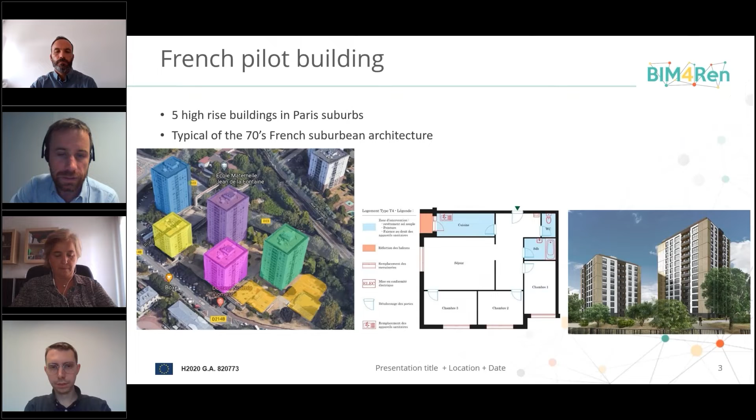There are in total almost 400 dwellings, so it's quite an important renovation that amounts to more than 10 million euros.

The renovation design selected is mainly about the envelope of the building—external thermal insulation renovation, improving air tightness. The air renewal of the dwelling is also to be modified, and the central gas boiler for heating and domestic water will be replaced.

There are also other renovations not related to energy performance, about the bathroom, electricity, internal areas, external areas, security, and so on. We underline this just to show that energy is not the only criteria, and sometimes it could even be secondary if we consider, for example, security or other such criteria that could trigger the renovation.

The objective of developing the tools was to digitalize the process and to consider, at an early stage of the project, the costs, the energy consumption of the existing state and under potential renovation scenarios, the CO2 equivalent emissions under those different scenarios, and also—which is a bit more important nowadays—the comfort in the dwellings over the summer. It has to be quite quick but reliable.

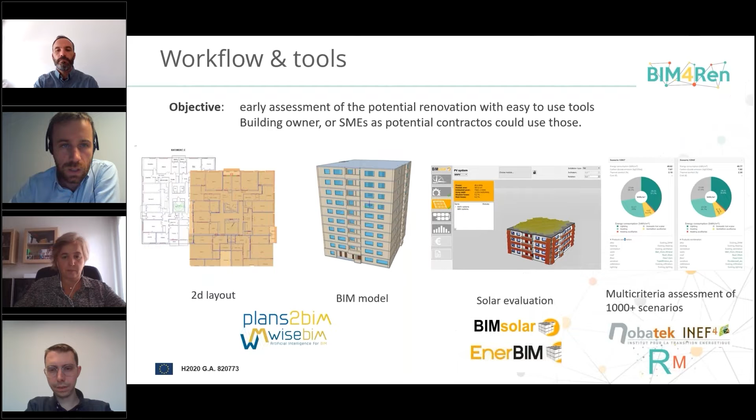We start with 2D layouts of the building, and from those 2D layouts we create an IFC model, a BIM model, using Plans to BIM by WiseBIM. Afterwards, this BIM model will be imported into another tool, the BIM Solar tool by EnerBIM. The last one will be the energy renovation scenarios assessment tool, called Renovation Manager. I'm starting with a short presentation of WiseBIM, and then I will use the tool.

WiseBIM is a French startup, a few years old, that has developed Plans to BIM. Plans to BIM is an online software that imports 2D plans and layouts as images, and by identifying patterns through artificial intelligence, it recognizes the elements composing the building—walls, windows, and so on—to create a BIM model in IFC as a standard.

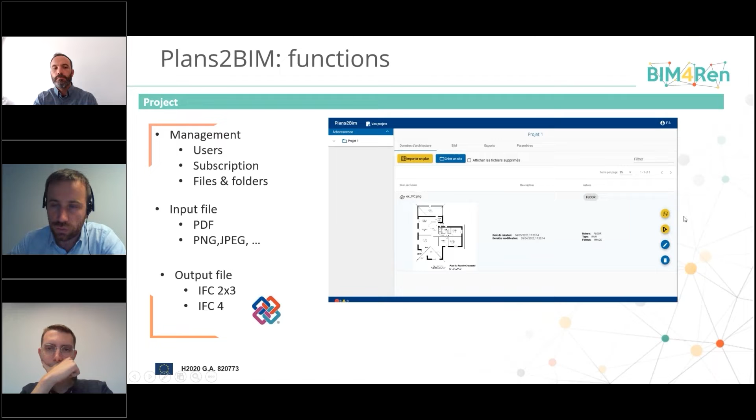So I'll go quick, but it's an online web tool in which you will have access. You will use as inputs the 2D layouts, and through different steps, at the end of the process, you will create an IFC file that you can have as either IFC 2x3 or IFC4.

What's key also, it embeds a viewer and an editor. I will demonstrate. It allows the model to recognize walls, windows, doors, slabs, spaces, which is information on top of the geometry - information about what is a wall, external wall, internal wall, window, and even properties of the wall can be added.

So that's the process of collecting such 2D layouts. Either it exists before even considering the renovation, or it has to be created by other alternatives, such as a scan or a surveyor that will create those 2D layouts.

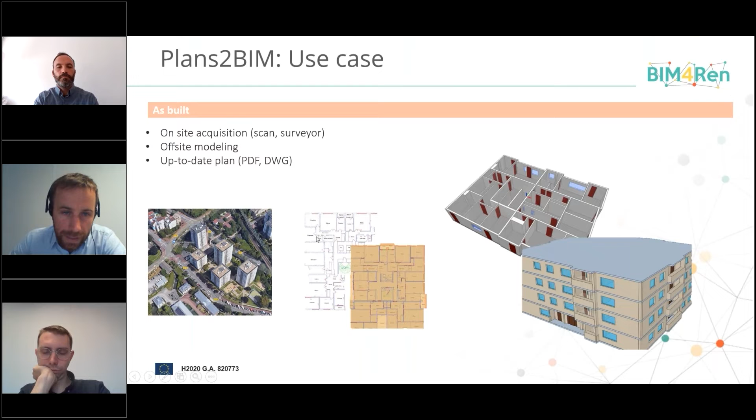Plans to BIM is, as you can see, a web-based tool in which you log in. It's free to create an account, then you create a project. Here I have a project already created. In this project I will find my different buildings, and in a building I will find different floors.

In this case, in the Joinville building, which is the one we are considering, I will import the plan layout. From this layout, it will recognize the PDF file I just imported, which you can see here. I will import it. It is now uploaded, and I will work on this case.

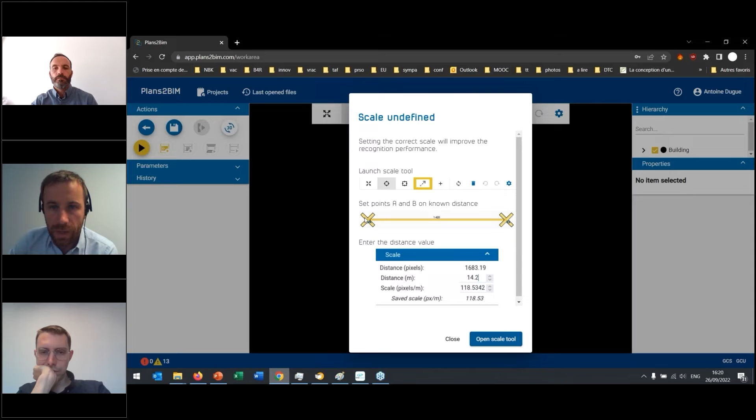You can see the layer. So I will open it in the modeling tool, where I first need to define the scale as an input. Here I'm just going to zoom in - it's pretty easy, the typical buttons.

I recognize that in this kitchen, these lines that I can adjust a bit measure 4.45 meters. I'll just put it there and validate. It says there are 74 pixels per meter, which is okay - let's just say it's not perfect, could be better quality.

Once I've got this scale, I can run the automatic detection. I will run the full detection - I could do it step-by-step, but let's see how it goes. There are parameters to recognize the wall thickness, it might not be exactly that, and minimum length, so you can adapt a bit.

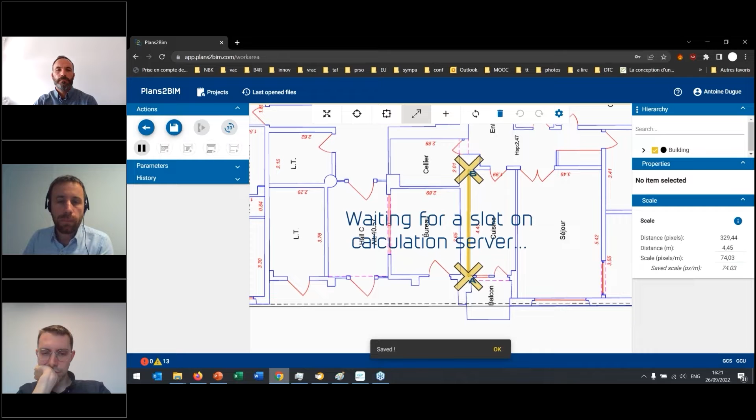I will now run the automatic detection. It is done on the Joinville 7. You can see it's a quite short process. I'll tell you that it is, again, free to use at this point.

You are going to create BIM models that you can edit, and you only pay if you export it as an IFC file. So you can try it and see if the results fit your expectations.

So you can see now the model that has been created, and now there's more information. You can see there are some blurry elements here and there. It can be pretty easily fixed, as you can see, I'm going to remove some of them.

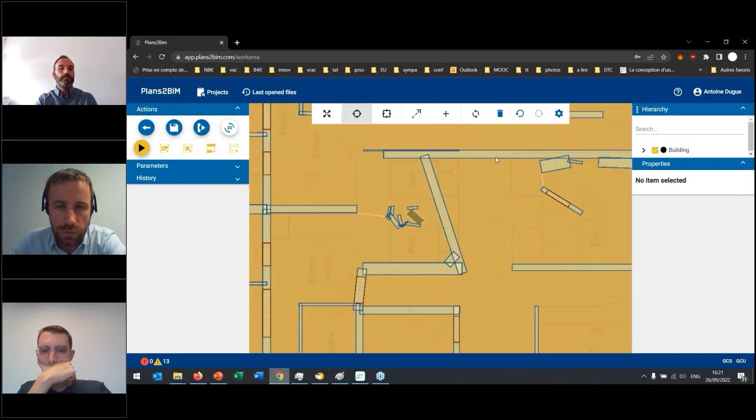I'm not going to go through the full process of modifying that. There is a stair here that has been poorly recognized, but I can, for example, use a wall and modify it - oops. Okay, I'm going to use, I might have...

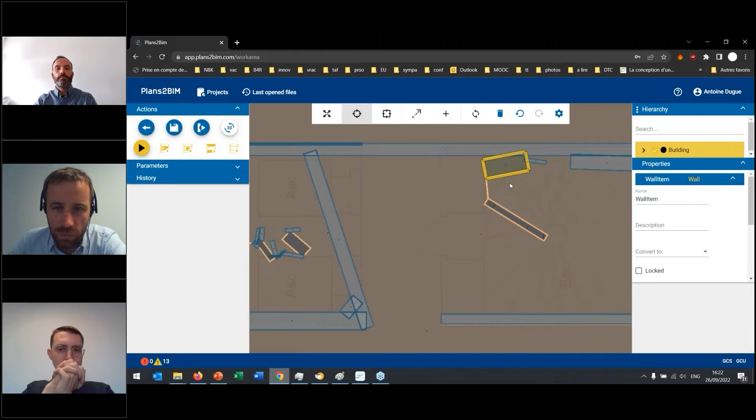Okay, box selection - I'm selecting this, and you can see that I'm moving it. I want to rotate it, but I'm opening too much, as you can see at this stage. It's the zone I'm selecting, I'm not actually selecting a wall.

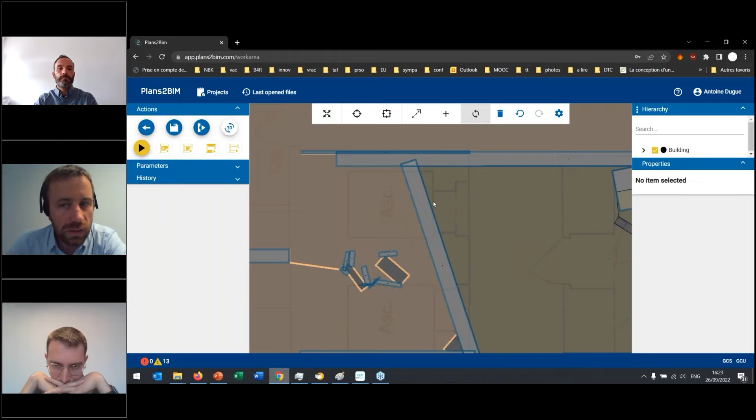So here, this wall - I'm trying to fix some elements. You can see that the zone is created. I'd be happy if I could turn it, because it does tell me that it's a wall item. I want to rotate it, but not using this one - right now I fail to move it.

Yeah, as you can see, I can modify it. I'm not clearly an expert user, so it should be better done by someone who has been testing it a bit more.

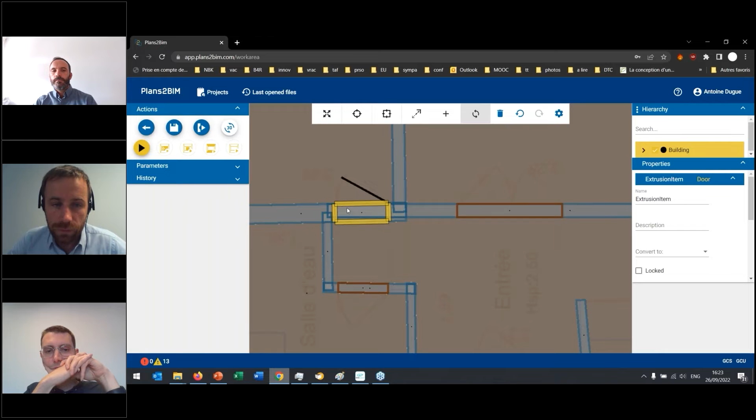So once you're happy, you can then export the model. At this stage, you can also just check in an internal viewer if it's well recognized. The very problem that I had noticed is here: the slab is not closed.

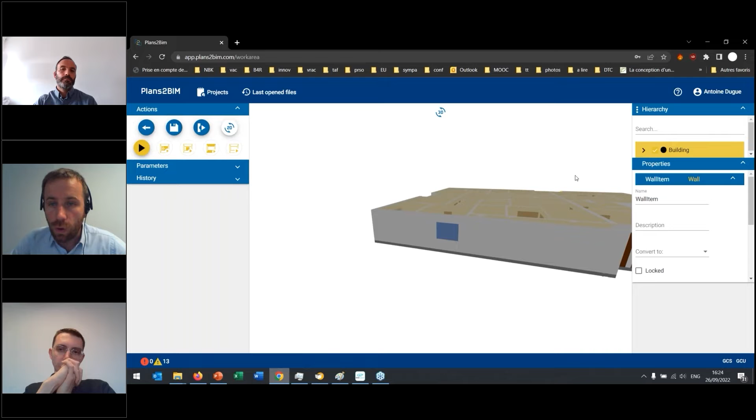There are some blurry elements that should be fixed. So although it's not a perfect recognition of the file, it's still something which is easily fixed, and you can do it quite quick.

Okay, then if I am happy with these elements, I can save it, and then I will create potentially a few floors like that. Once I have the few floors, I will create the full building.

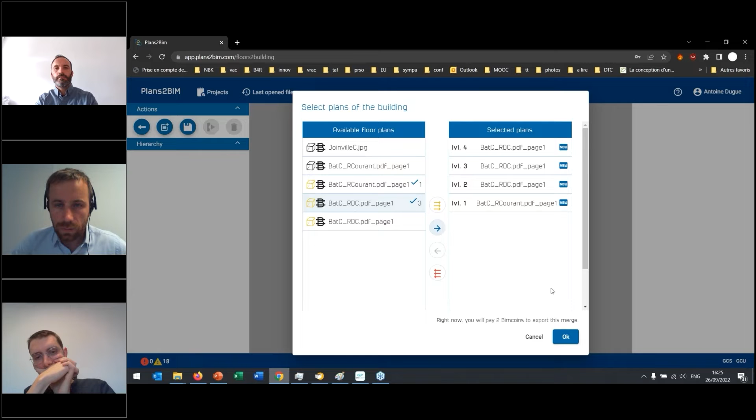Once I have that, I should be aligning those 2 floors that at the moment are not aligned.

The resulting process, when done a bit more carefully, is an IFC file such as this one. So this was done by, let's say, a half-day trained user in half an hour. You can see different storeys.

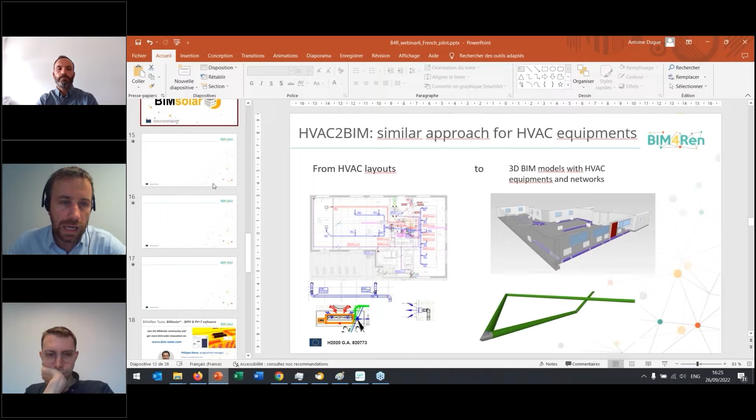So another tool is the BIMsolar tool. I'll be quick. The BIMsolar tool is a tool for urban planners and architects to assess the potential of PV installation for existing buildings. The idea is to import a BIM model to assess the installation of PV panels, the electrical production, and even potentially the cost of it.

The technical outcomes, the outputs of this software, are the electrical production, the potential losses in the wiring, and even a cost assessment and self-consumption under different scenarios.

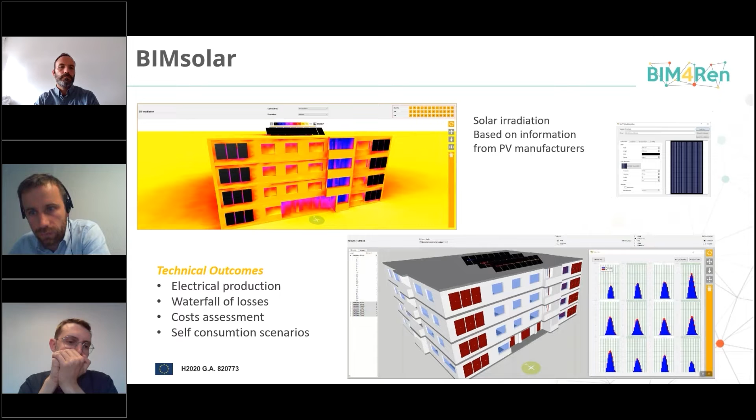Again, very shortly, I will show that this is the very same building that has been at the beginning imported, where you can see, regarding the sun path, its irradiation. I can see it at different moments.

The one thing which is very important is that the PV panels you're going to install come from an external library made of PV panels as BIM objects. Those have been provided by the very same manufacturers.

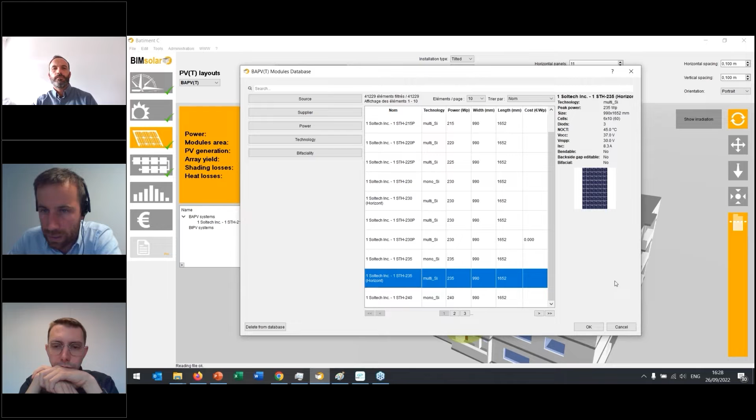So if I change, I choose one, this is the one that I now have, and if I choose to install it on the roof, as you can see, I will have it. I will quite easily duplicate it just to assess the potential installation, and obviously you can do it a bit cleaner than that. I've got this huge PV installation on the roof.

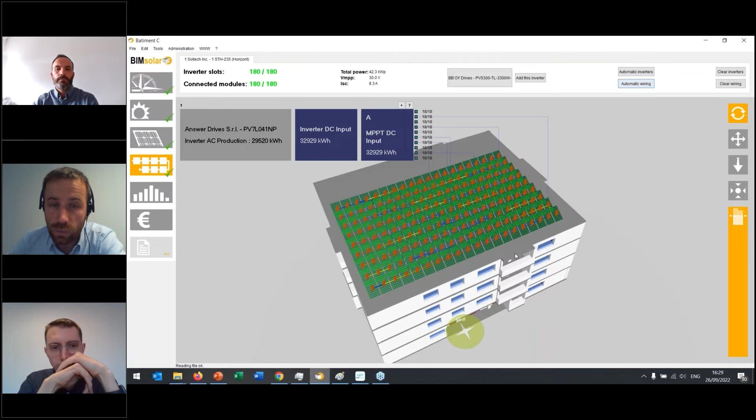I will then consider the wiring of the different elements. I can even say this is - I will just choose the first inverter and go with automatic wiring in between each of those.

And from there, it's possible to assess for those elements the monthly production, as you can see, for each of those panels. And once we have that, you can check on those different scenarios the network consumption and the self-consumption if there is electrical load from the building.

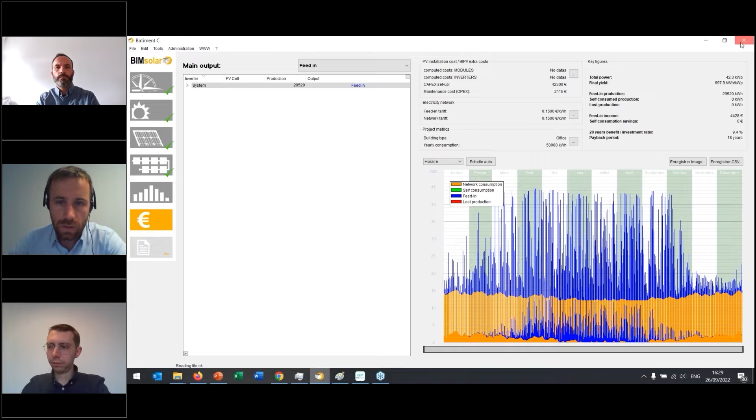So again, this is a free tool that you can find easily online, based on BIM, to assess the potential of solar installation. Philippe Alamy is the main developer, with his company, which is called Enerbim, a French SME.

Another tool is a renovation manager. For a set of buildings in a building management portfolio, we will consider different renovation projects, and for those renovation projects, we can consider renovation scenarios. For example, there could be a low ambitious one and a high ambitious one as a project.

Then we describe the potential renovation of a building. The idea is we start with buildings in this portfolio, we create those renovation projects, and then we focus on the energy renovation and run those simulations. What's key is that the building is composed of envelopes and systems, an envelope being walls, windows, roof, doors, and even the infiltration related to each of those elements. The HVAC systems are mainly ventilation, heating, domestic hot water, and lighting.

And the usage, the internal behavior of the tenants, is fixed. It's made under some hypothesis, but it's not something that could be changed. The idea being that it's not part of the design, it's rather something related to the tenants themselves.

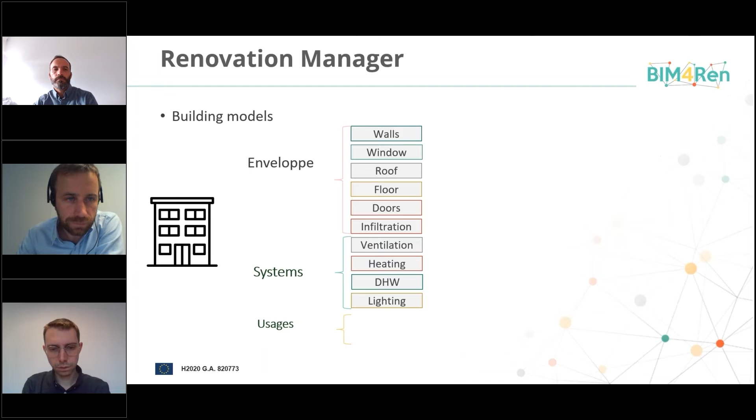So the idea is to explore the results dynamically in graphs, and then to export the potential energy consumption and so on. I will demonstrate that.

So this is the renovation manager. Similarly, one gets to log on to that. It's not at the moment, it's at a stage of development that's not allowed to have external users. Hopefully it will reach this point in the coming months or year.

So in this case, we have a building that is created. We are going to consider its renovation. First we need to add some basic information about the building regarding its facade area, the typical number of dwellings, and so on.

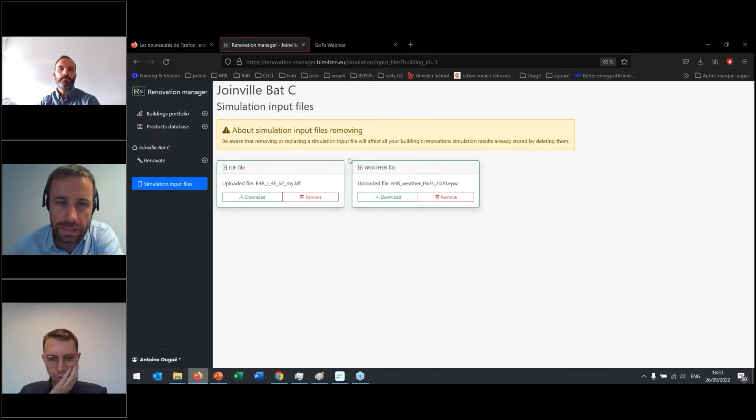Then we will use an input file that is used for energy simulation. In this case, it's done through the EnergyPlus engine, so it's an IDF file. More information could be found on the BIM4Ren website. A weather file is also dropped here, and you can see it has already been uploaded from the computer. So those two files have been uploaded in this case.

And the idea is to first describe the building. The domestic hot water is pretty straightforward: we select if it's done with, in this case, a gas boiler, electric hot water, or solar collector, the volume of it, and so on. We do the same for each component, the heating system, and typically the window, for which we are going to choose its frame material and its thermal characteristics.

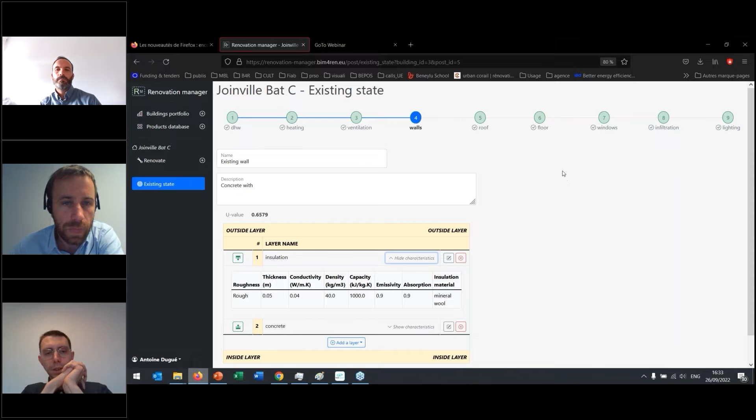Similarly, the wall is made of layers, in this case of concrete and insulation, for which we specify the characteristics and the thickness. Once this is done, the existing state of the building, we can consider some potential modifications. So modification is: okay, my heating system is initially the one I just showed, but it could also be a modified version with a higher efficiency, for example, that comes with a cost.

Similarly, the window that I just showed, I can consider a double glazing window with better characteristics, or even a double glazing window, but in this case the frame material would be aluminum in one case and wood in another. And the third one is a triple glazing window, with different characteristics. So then when I consider all those potential modifications, I'm facing quite a lot of potential renovation scenarios.

This is not the one I want. Well, I'm just using, let's say, a dummy test here. But if I want to consider a case, the one that's been done here is we consider the domestic hot water boiler modification, we consider the 3 different heating systems, and we consider the modification of the windows. At this stage, the combination of that is 64 potential scenarios. We are going to assess that.

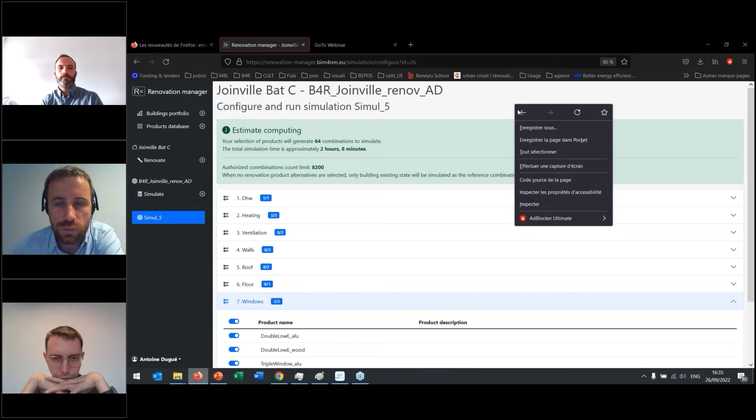So this is what the renovation manager is about: to compare and explore those different scenarios, and for a potential social housing organization to be able to themselves assess the potential renovation.

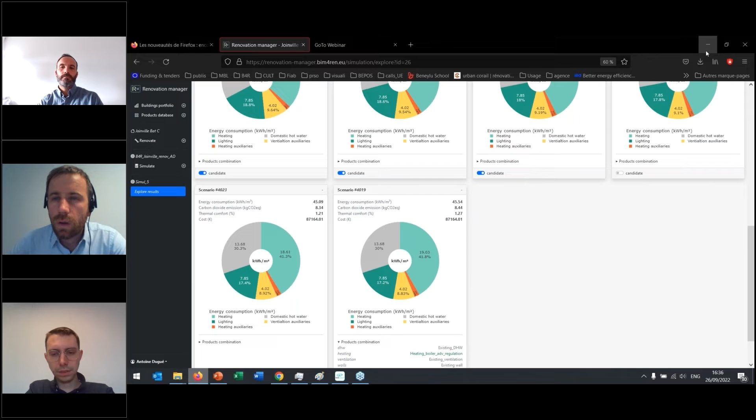And from there, this was 3 different tools that I showed, and more can be found on the BIM4Ren website, and that will be it for this French pilot demonstration.

My name is Natalia Lasarte. I'm from Tecnalia, a Spanish research center located in Basque Country.

Before giving the floor to Martín, a few words about the Spanish pilot and how this adventure started. When we drafted this project together with Nobatek and other partners, we were aware that the planned developments should be user-centered. That's to say, they needed to be tested, discussed, and validated by the end users during the whole process. Besides, the end user had to represent the common renovation company of the construction sector in Spain - a small size company with a low level of digitization, which represents the majority of the construction sector in Spain.

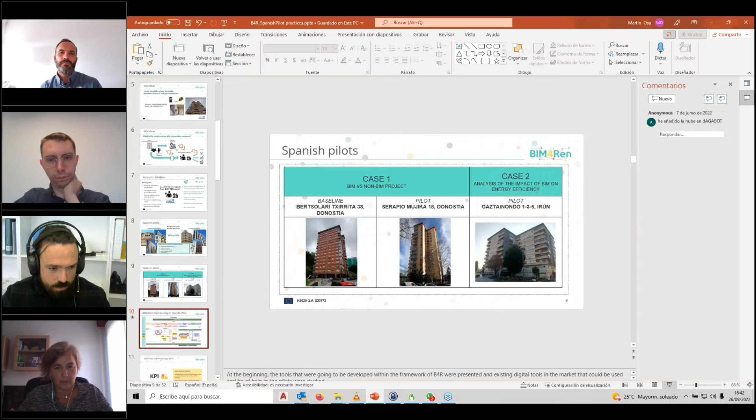First of all, I would like to explain briefly the process of a typical project - how is a typical workflow in a project of Grupo Kursaal?

Normally, usually the final client is a community of neighbors that wants to fix the pathologies of their building, and they want to do it through a property manager, or they can do it by themselves. So the first thing they have to do is look for an architect that will design and choose the best solution for their building. In our case, it's always about the energy renovation of facades, like ETICS or ventilated facades. Then after this, they must start a bidding process to choose a renovation company to execute the project that has been designed by the architect. At this step is when we have a first contact with the project, and we must study the work in detail in order to give them the most accurate budget possible.

At this point, we already encounter several problems. For example, on one hand, we cannot participate much in the initial design of the project because it has already been done by the architect, so the success of the project relies a lot on the workflow of the architect. So if it doesn't work with BIM tools, we won't be able to do a lot of things.

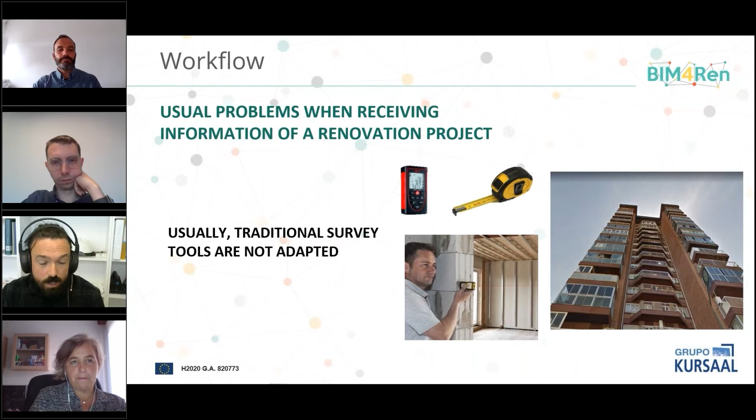Once we have made a first budget of the project, they will choose our offer, and the project starts. We have very tight deadlines. We have to hire the professionals who are going to carry out the works, and we have to start sharing documentation with the architect, the clients, and everyone who is going to participate in the project. A lot of documentation is generated at this stage: plans, images, budgets, technical documentation. So it is essential for us to have fluid communication with all these stakeholders.

We find ourselves, in summary, at the following point: we barely participate in the design phase. Our projects are not very complex, but it is important for us to have accurate plans and accurate documentation, and we have to manage a lot of documents and resources.

So we found that BIM4Ren could help us with the management of these documentations, because BIM methodology is a great opportunity to better organize and share documents. Also, even if we don't participate in the design phase, it is interesting for us to help the architects we work with in these phases. We will also be able to use different tools to better define the existing building, and this will finally stimulate the communication during the project.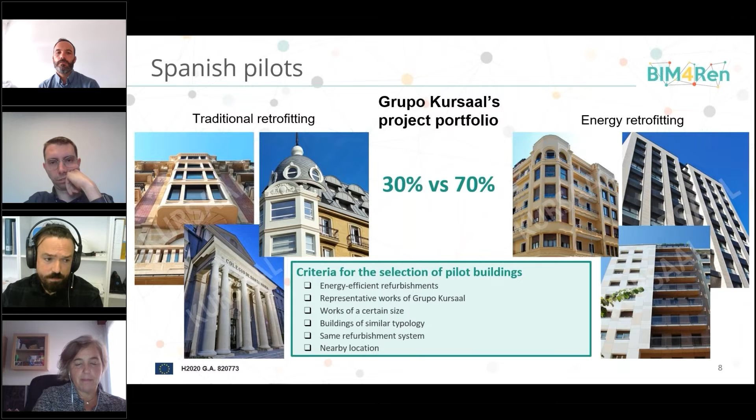In order to test the tools, we needed to choose some pilots to work with at the beginning, taking into consideration that most of our projects are energy renovation of facades. We thought it would be most interesting to choose a project that represents this kind of building, mostly energy renovations using ETICS or ventilated facade. So we chose three pilots to test different tools. On the one hand, in the first case...

We chose a baseline that would be used to compare the results we get in the pilots. The objective in this case is to carry out an analysis of the different processes in our company when working with traditional tools on one hand, and with BIM tools on the other.

The second case: here we also wanted to use BIM tools and digital tools, but we wanted to focus more on studying the impact these tools can have on the analysis and energy performance of a building, and to estimate the positive effect that the renovation can have on the facade.

These three projects have been developed almost entirely within the duration of the BIM4Ren project. At the beginning, the tools that were going to be developed within this project were presented by the different members of the BIM4Ren project, and we also studied the different tools available in the market, so we could choose the most interesting tools for us.

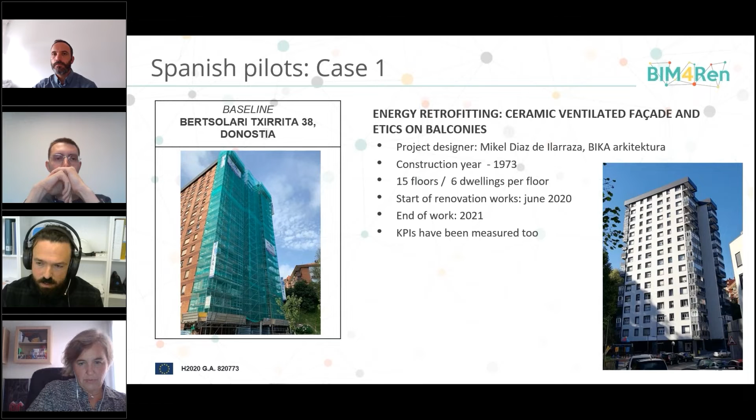As we wanted to use it as a reference, we measured different number indicators in this project. The pilot in this case was a similar building of 15 floors too, in San Sebastian, from more or less the same period, the 60s-70s. We also finished this project in 2021.

Here, the main objective was to generate and use an as-built BIM model in order to calculate as accurately as possible the material needed for the works, the material we had to buy, and to plan an optimum design of the execution of the ventilated facade.

Because it is a process that is quite expensive for us, we wanted to do it as well as possible. So the first step was to produce a reliable and accurate current state model that would allow the project managers to plan the project with the confidence or security they want, that they would work with reliable measurements and distances.

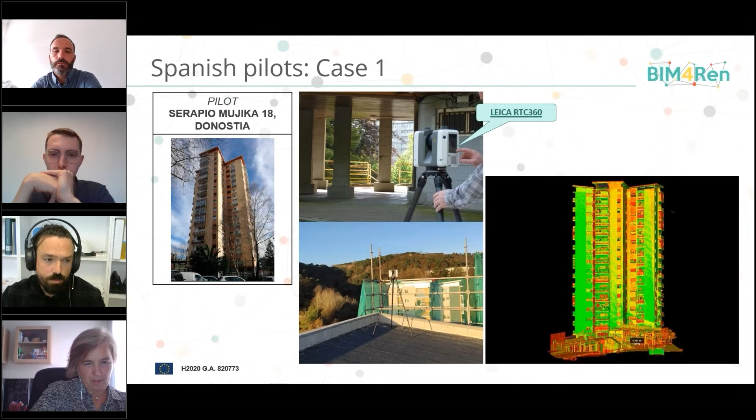To do this, the first thing we did was a 3D scan of the building envelope using a Leica scanner, and we captured the geometry of all the facades and the main access of the building. We also scanned the roof and some open balconies that were going to be renovated during the works. Once all the data was processed, we obtained a complete point cloud of the building that we used as a geometric reference to make the BIM model, as you can see here.

For this process, we followed a typical scan-to-BIM process. We introduced the point cloud into our BIM software, which was Autodesk Revit. This BIM model has been a great help for quantifying the amount of material and calculating the dimensions of the panels that had to be placed.

So that we could make an accurate plan of the cut of the panels in the factory, so we could reduce the generation of waste and be faster in the works.

The next pilot, the second case, was a pilot of a big residential building. There were like three buildings in one, so it started quite late in the project, but it is supposed to be finished at the end of this year.

Here, the renovation was going to be made with ETICS, but our main objective wasn't to plan exactly how we were going to execute, but to calculate the material needed for the works in order to get a better price from the professionals who were going to work there, and also to generate an energy model to compare it with the monitoring data that would be made afterward.

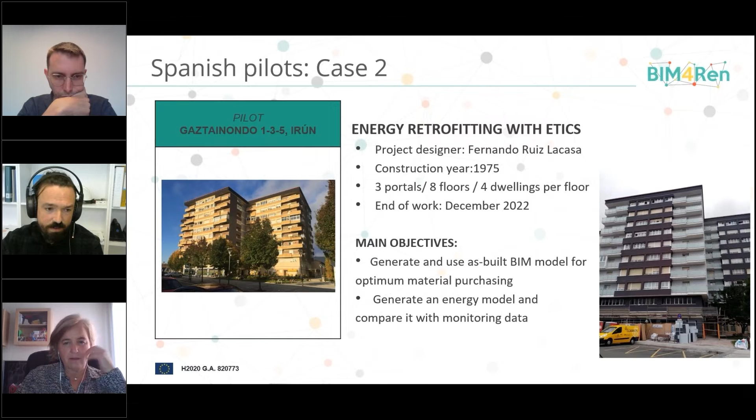In this pilot project, a scanning survey has been carried out as well. We have used it for generating a BIM model of the envelope and also of some dwellings that have been monitored, where we placed some devices for doing the energy monitoring in those dwellings.

With this BIM model, on one hand, we have calculated the work areas, the amount of square meters, and the amount of material required for the work. With this information, the manager of the works has been able to get a better price with each professional. We have analyzed the entire budget line by line, and also we have been able to separate it into different time phases.

This is a great help in order to better manage the different phases of the building and to better manage the amount of material that we have to stock in our works, and to improve the logistics of our projects.

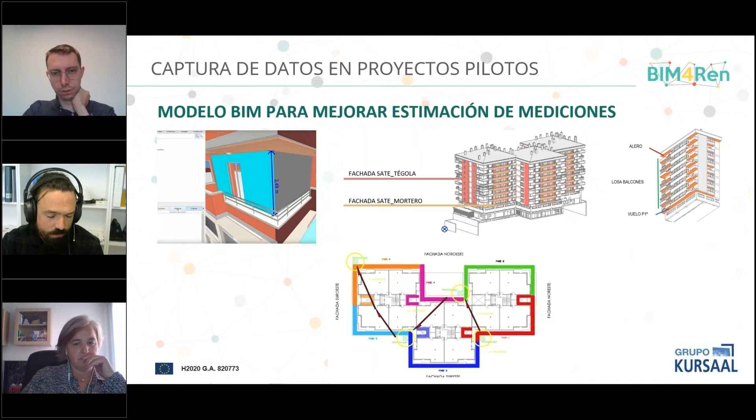In both pilots, we have tested different tools developed within the BIM4Ren project. It is true that several of these tools are not properly adapted to be used during the works, because they are more adapted for early phases of the design of the project. But it is interesting for us to get feedback to allow the developers to improve the tool.

So of these tools, we will focus on those developed by Tecnalia: the Parametric IFC tool, GIS-to-IFC, and BASE+. Once we tested all these tools, we made an analysis of them, evaluating different aspects such as usability, ease of use, and processing speed. The entire analysis will be reflected in the deliverable and published on the BIM for Rent website.

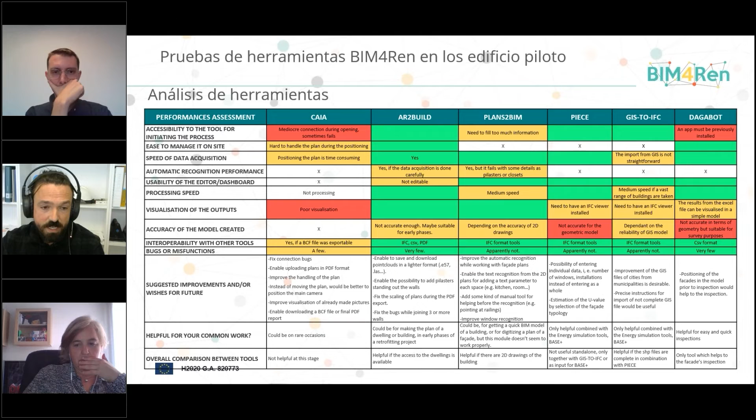So these three tools from Tecnalia - GIS-to-IFC, Parametric IFC, and BASE+ - are like a pack of three tools that we can use in sequence, or we can enter at different steps of this process. For example, if we didn't have any documentation of the building, we could try to go... but if we have a shapefile of the building, for example, the GIS...

GIS is a geographic information system where we could find, for example, the perimeters of the buildings of a city. It's a geometric database enriched with other kinds of data, like the height of the building or the use of the building. So if we have access to some of this information, we could get a file to introduce into this tool in order to generate an IFC BIM model. Quite simple, but we can start working with it.

If we didn't have access to this kind of file, we could enter the second tool directly and introduce the geometric form of the building manually. It will create a BIM model based on the information we input, so it would create a more accurate IFC model with the facades, the windows, the height, and the number of floors of the building. So we have a better base to start working with.

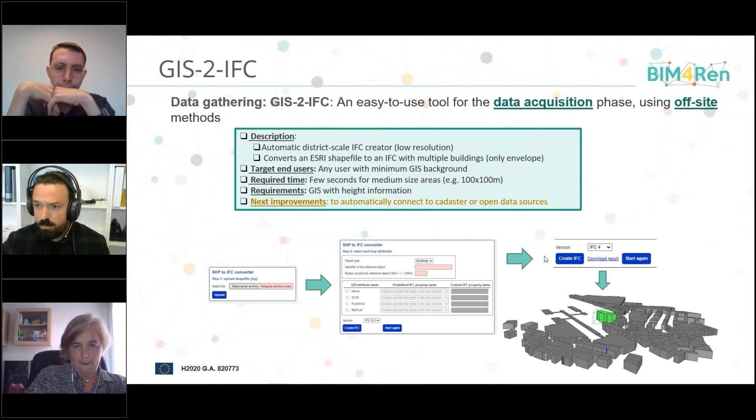For the first one, here you can see some captures of the interface, but there is a video that I would like to show you, so that you can see how it works.

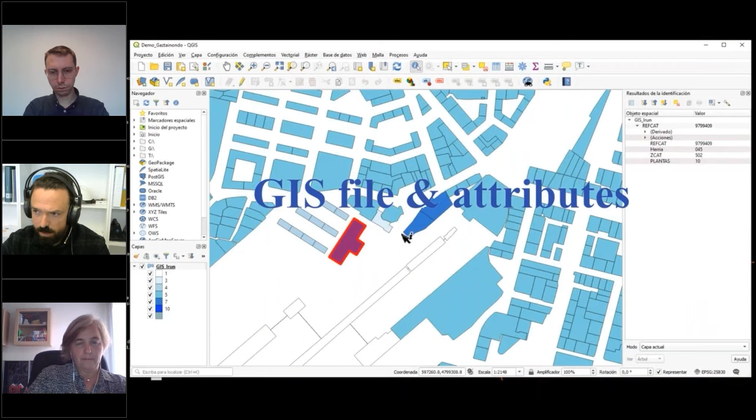As I said before, the first thing we have to do is locate the building, to identify it. In this case, we did it with both pilots, with Serapio Mujica and Gaztainondo pilots. Once we have located it, we can try to find it in a GIS system. Here we can see there was a perimeter geometry and data like the number of floors and the height of the building.

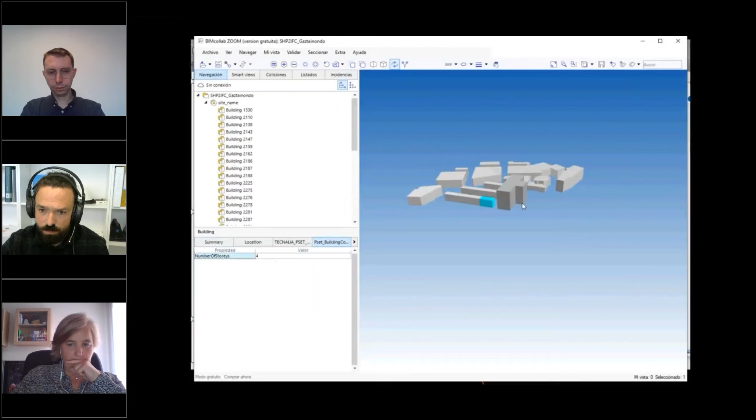And with that file, we have to introduce the building ID code in order to get an IFC model from this database that will use this information. Here you can see that there is a simple, but already a BIM model of our building that has been introduced. It has inside the number of stories or floors.

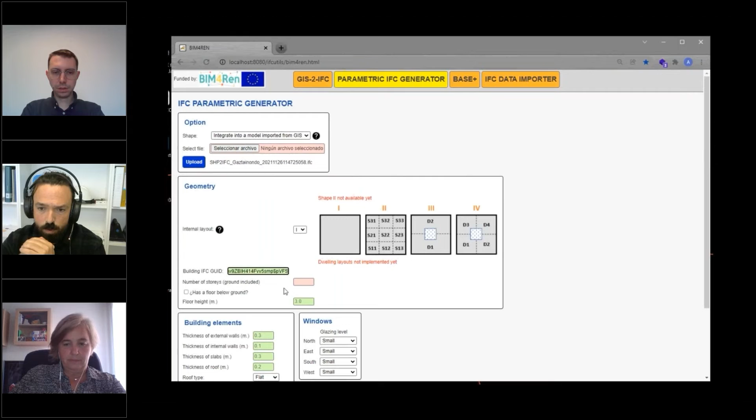Once we have this, we can introduce it directly into the next tool, which is the Parametric IFC generator. All these tools are together on a website, so we can jump from one to another directly, very easily. We introduce the IFC model generated in the first step, the IFC code, the IFC ID, and we introduce manually some data like the orientation, the amount or size of the windows depending on the orientation of the facade.

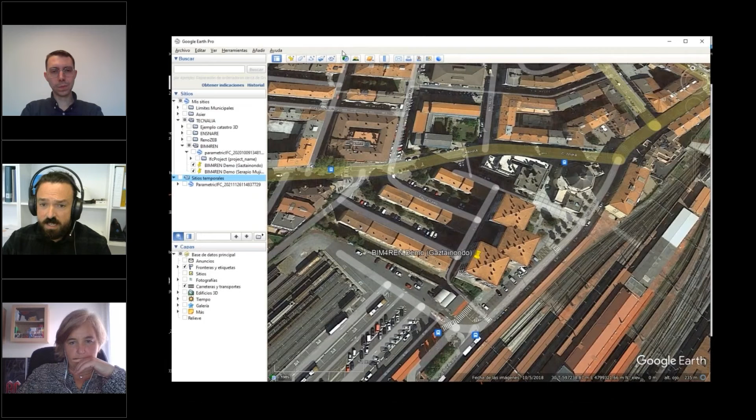Also, we can introduce the thickness of the walls, the kind of roof it has, and after a few seconds it will create a new IFC building that is more accurate than the previous one. It's quite simple, but for example we can start extracting some numbers, some statistics, like the percentage of windows on the facade, or use it for getting new renovation scenarios in the next tool, Base Plus.

What we have seen in the video was the case where we had an IFC model from the previous tool, but if we didn't have it, we can manually import some inputs to generate a geometric perimeter of the building with these kinds of forms, like a square perimeter or a cross perimeter. So with these steps, we can create an IFC model.

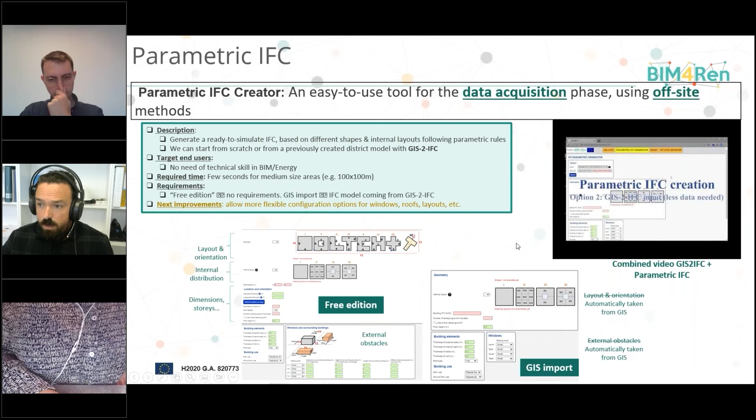The Base Plus tool, as I said, is a decision support tool for the diagnosis and data-driven design phase. We will introduce an IFC file, along with some manual inputs like the U values of the walls and the heating system of the building. Using the EnergyPlus engine, it will generate different scenarios, and depending on the aspects we define as more important, it will give us different renovation scenarios.

Okay, let's see another video quickly.

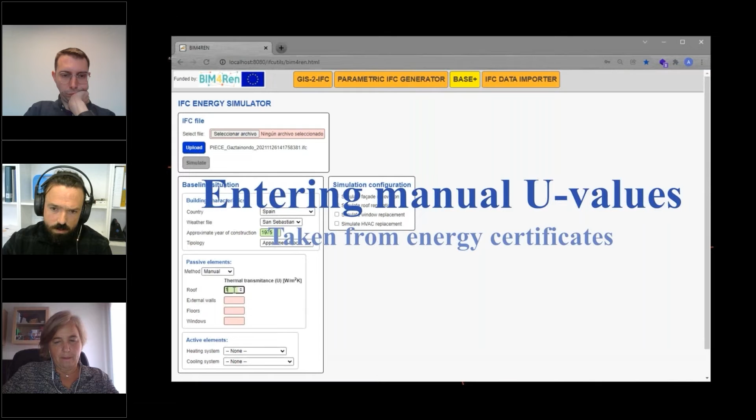So we will upload the IFC model. We will introduce some inputs like the location of the building, in which country and city it is located, so that it calculates differently depending on the location. Also, we can manually introduce the U value of the walls and the heating or cooling system, as I said before.

Also, we will ask it to simulate roof renovation, window replacement, or HVAC replacement, and depending on that, it will give us different solutions. We can also weight different indicators, and we can extract an Excel file in order to use all that data in a more advanced way.

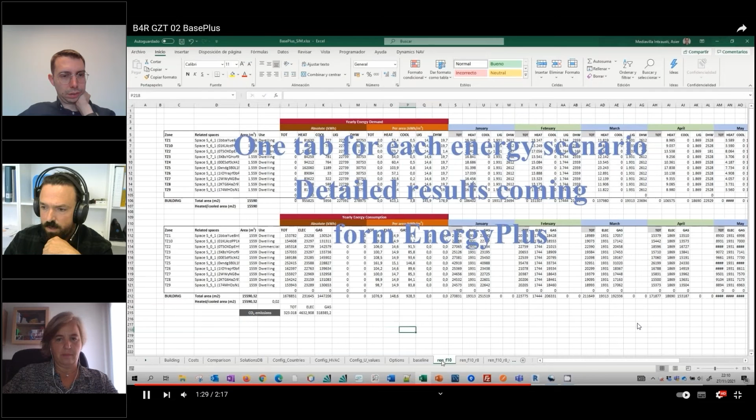So, for example, here it's quite complex at the beginning, but it will give us different scenarios, using a thicker insulation system or a thinner one, or using a ventilated facade. Depending on the scenario, it will be cheaper or have a better impact on the environment or on the economic sustainability of the renovation.

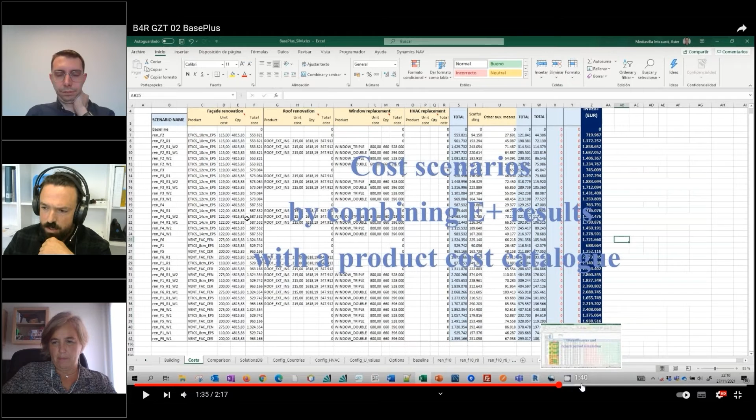So after that, now I'm going to tell you a little bit about the KPI methodology.

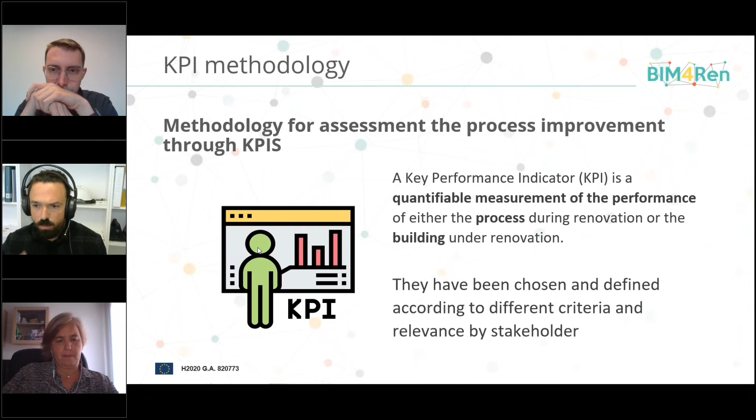This is a method we have developed in this project with some stakeholders of the BIM4Ren project. The idea is to have numerical indicators that let us compare and evaluate the success of a building in an objective way, for example comparing the performance of the building once it has been renovated.

Finally, we have defined a lot of different indicators. Some are more oriented to assess the process of the works, and some are more oriented to assess the performance of the renovated building. But in the end, they are like little mathematical equations or formulas that we can calculate, and they give us numbers that we can use to compare buildings.

It's very interesting for us because in the early phase when we are studying a building or project to get a budget, depending on the indicators we have got in previous projects, we will be able to better estimate the cost of a work, the waste generation of a work, the emissions of CO2, or the energy savings of a building.

Some other indicators give us a number for the quality of the BIM process during the project, but they are quite subjective indicators that we have to introduce in a subjective way. They tell us how well the project has been developed, or the technical abilities of the professionals who worked on it regarding BIM methodology, or the BIM collaboration during the project. We have also decided on a way to define these.

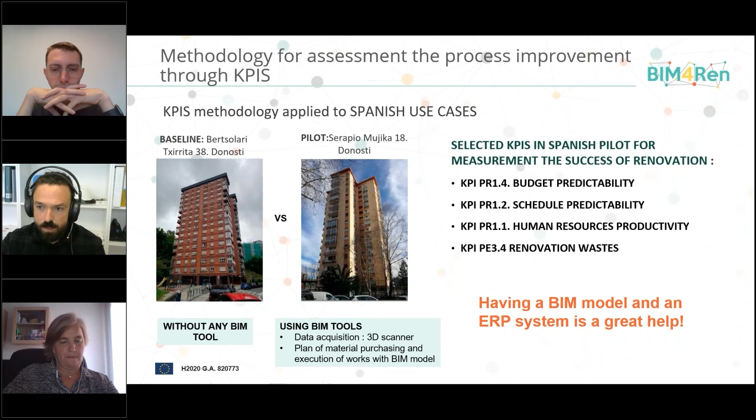Finally, we have carried out energy monitoring of several dwellings in this pilot. We monitored 5 dwellings on Castañondo 1, tracking indoor temperature, relative humidity, CO2, gas consumption, and electricity consumption. We used devices that measure data every 10 minutes, so we can gather all this information, and we have also run some simulations using the TNO tool.

So because we have all this data, one of the results was that comparing the energy performance of the building and the renovation with the captured data from the monitoring, we can estimate the impact of the users, the neighbors, and how much of those results were related to their behavior, for example opening a window.

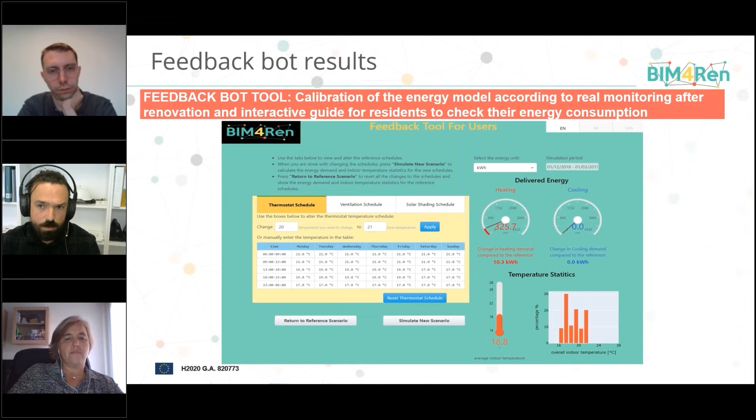Finally, we are working on linking this monitoring data with the BIM model we have developed, so that we can give this information in an attractive way to the neighbors, so they can access the data that has been monitored, like energy consumption or temperature in their building. They will be able to access that data online.

Okay, and finally some conclusions. BIM in renovation is not only a set of tools, it will have an impact on the whole renovation process. That's why we said it is important to work with architects from the very beginning using this methodology.

Also, we have realized that all these tools are affordable to small and medium enterprises, because they are easy to use and not as expensive as other typical tools. So we encourage these professionals to use them.

There is a wide range of BIM-based tools, even if they are not exactly BIM but related, or we could use that data to introduce them into a BIM model. It's important to adapt the use of BIM to suit the companies, not the inverse. We think it's a great opportunity for companies like ours to use this methodology.

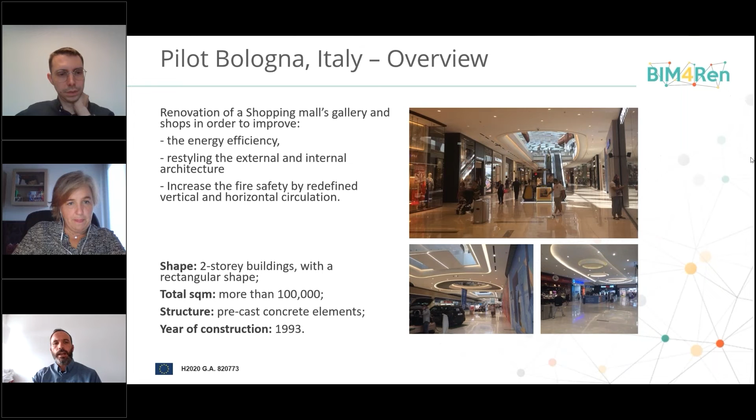This project had certain challenges related to the COVID period that pushed back the initial finalization dates we had in mind for the renovation, but it's been finalized as we speak. It's September 2022, so this month.

CMB Carpi is the constructor for both of these renovation projects I just mentioned, and they are the ones hands-on, on-site, putting the BIM4Ren tools to the test.

Finally, as a final overview of the BIM4Ren digital tools tested in this renovation project, I'll present this graphical schema that highlights in red these tools that we're promoting from the project and trying to test in different phases. They are structured in the schema according to the phase they belong to, from strategic planning to construction and commissioning phases.

With this, I'll leave you now with Luca Del Favero, the BIM coordinator of CMB, to give his first-hand experience and testimony in the testing of these tools, the problems they solve, and how their integration has been in their day-to-day. So Luca, the floor is yours.

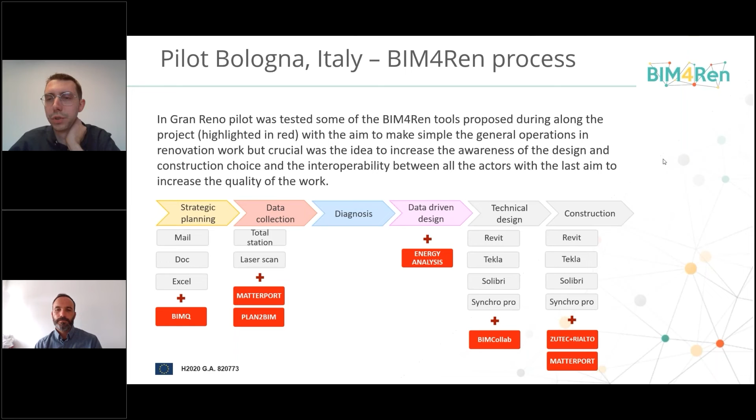Thank you, Ignacio. So today, starting with this workflow, we are going to see BIMQ software, then the use of scanning and Matterport, and then the experience in construction with Zutec and Rialto.

So I would like to always start with the problem. When we arrive at the project, what we want to understand is the problem that we face during the day in doing a BIM process in renovation.

Starting from BIM-Q, what we discover is that one of the problems in a BIM process is managing all the information connecting to a model and related to the contract we have to respect. In Gran Reno, the client asked us a complete BIM process by contract, and for this reason what we want to test is BIM-Q, a software platform that can store all the information of the project, but not only.

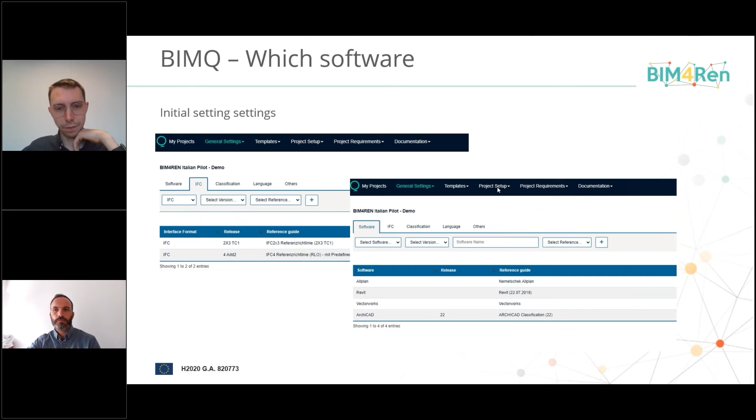We start with initial setting of the software by choosing the exportation, so the IFC format, which kind of IFC we have to use, which version, which kind of native software we have to use, and then start to define the project.

In which sense? Actors involved in it and their specialization, so architect, engineer, the discipline, and then the phases in the project - construction, execution and so on, design - and then relate which information has to be linked to this kind of phases. After that, one of the most important parts is linking all the information required in the model, in the elements of the model that the client wants.

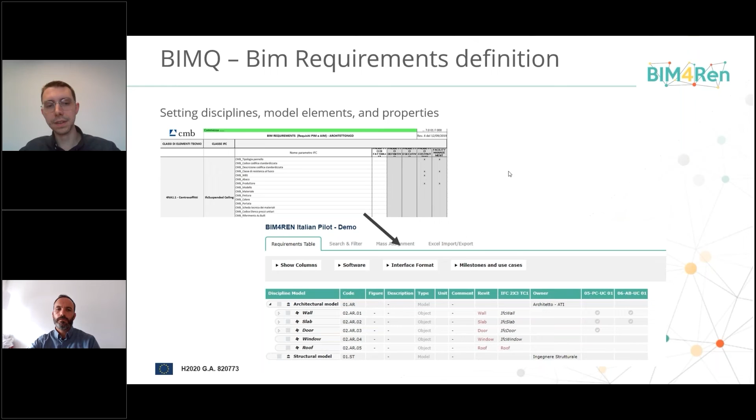So we start from the common Excel file that we normally use during this process, which is very difficult to manage because you have updates and then you have to share with all the actors. We start to implement it in BIM-Q with the aim of mapping all the elements in the exportation and being able to associate to each phase the property that we want to have, according to the timing and what we have to achieve as information.

Here we can see the articulation of the platform. You have an environment, a shared environment, where all the people can be involved.

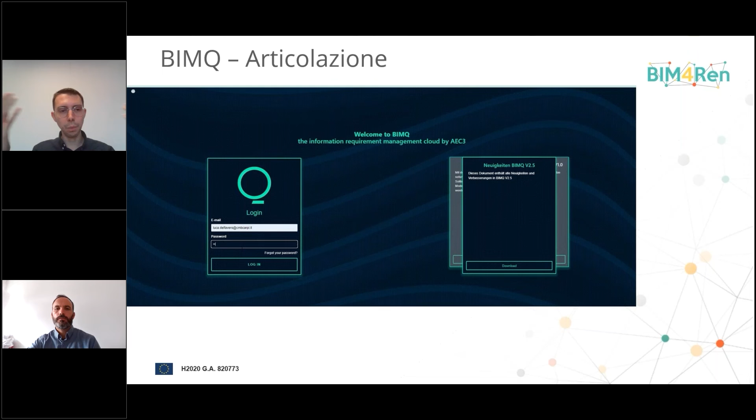Here is the login. With a simple login you can go through the platform. Then you can create a project, multiple projects also. And then you can try to set up your project - the participants, all the email and information of the organization, and the rights, so developer, user, and so on. And then start to set which actors are involved, and then the phases.

Then the use cases, so which information we have to have in the project during each phase. As you can see there, you cross which phase we want the requirements in, and then start to implement all the elements that we are going to have in the model.

And through this kind of setting, we are able to define some exportation through the different phases that we have set, and for the software that we choose at the beginning.

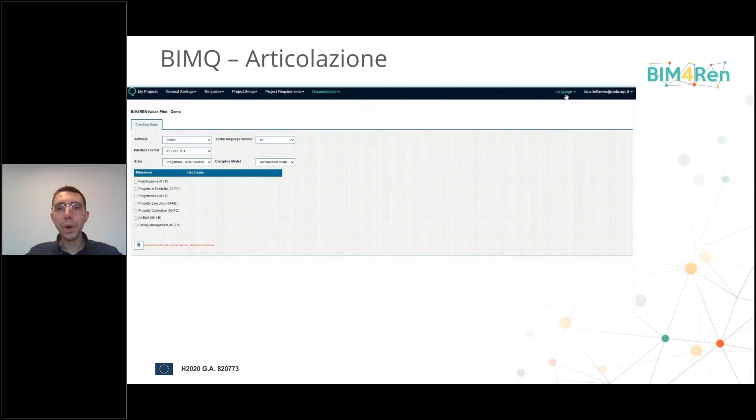So the most important conclusion is that with an initial articulation of the experience - let me say, a slower approach - you arrive at having a complete platform with all the information stored online, shareable with all the actors involved, and able to export at the same time, whenever you want, documents for the contract part, the BEP part, to share with all the people involved.

Shared parameters and IFC property sets are already put in place and able to be used in order to organize the work in the native software and in IFC version.

And then one of the most important parts for our side, for the construction side, is the possibility to check the quality of the model from the LOI part - so in terms of information, by creating rule sets in Solibri, one of the software used for checking in terms of geometry and information quality of the model.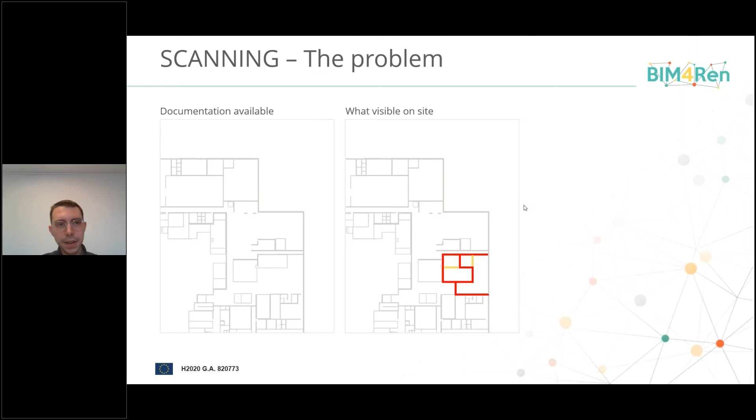For this reason, it's necessary to start the scanning, but it's not the only use of scanning. In fact, what we try in BIM4Ren pilot is to use scanning to see the work progress status, scan to BIM, so generate a BIM model after a scanning, and then also understand if what is put in place in Gran Reno was accurate as the BIM model or as per design, in order to avoid critical issues with the client in terms of NCR and so on.

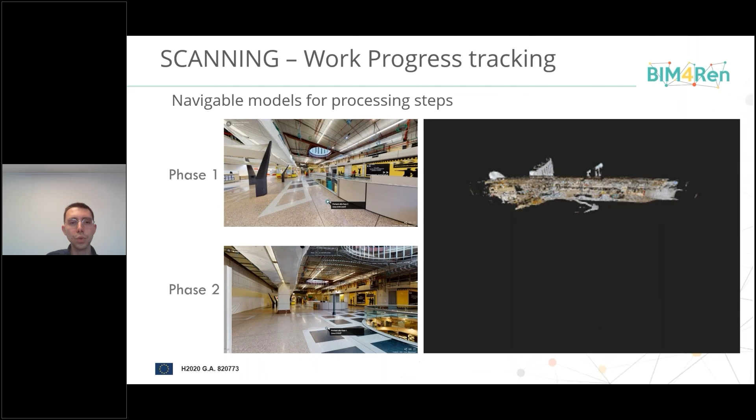After that, we are going to analyze the scan to BIM. Starting from an output of Matterport in XYZ, through Autodesk ReCap, we're able to use in Revit a point cloud that helps a lot in redefining the original status of the structure, architectural part, and for sure the MEP part, which are the most complicated and normally less accurate.

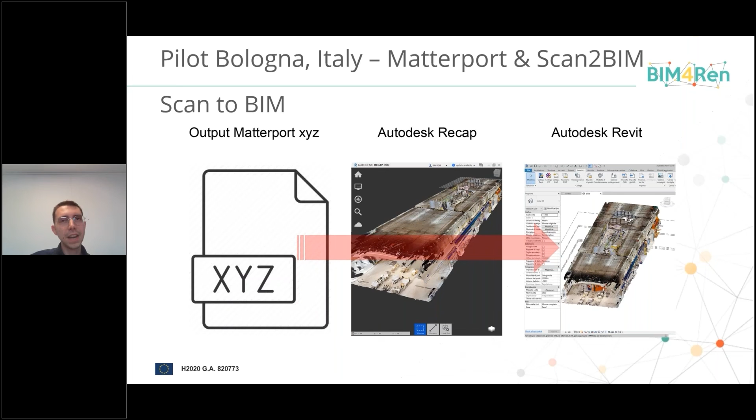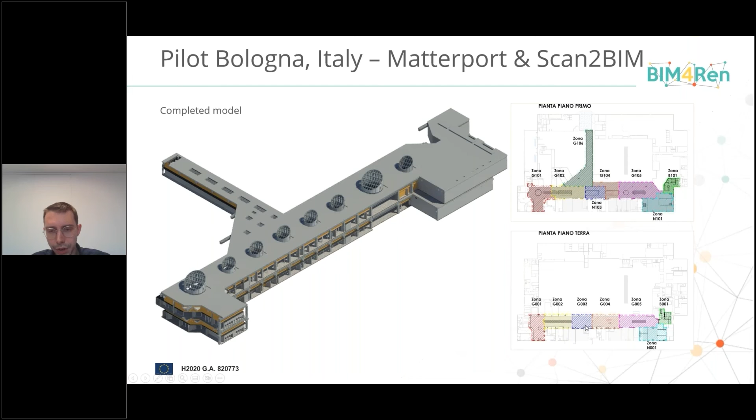And then the BIM to scan. So the idea is to check the accuracy of what we have on site in order to see if things were right and correctly put in place. This is to avoid, as already said, NCR.

So conclusion for these scanning tools in general: nowadays the cost of scanning is descending in terms of price, and the advantage of using this technology is affordable, also if we consider what it signifies to not use it - which are the impacts in terms of time and cost if we don't use this scanning before starting the works. And then in terms of geometrical accuracy, what I want to say is that it's high if we choose the right tools for the right work.

So basically what we have to consider is that in building in general, and when we talk about architectural MEP systems, we don't need millimetrical precision, but we need centimetrical tolerance. So this is something we have to consider when we want to choose a tool that it's not so precise, but precise enough for what I want to do.

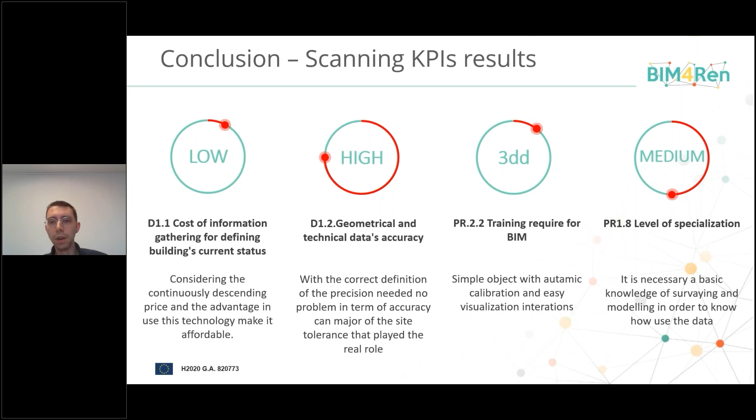So this is the part for scanning. And then the last one, related to the construction part, on-site part, is the use of the Zutec platform. Zutec at the beginning - which problem does Zutec platform solve? It solves the problem of tons of documents printed and scanned that are stored in the office, normally in the quality office, that bring all the stuff related to NCR, snag lists, and so on, that normally are related and connected through an Excel recap, manually updated, and most of the time full of errors.

And then all this stuff is sent through the responsible of the quality to many subcontractors or the client in tons of emails. So it's difficult to track, because when the responsible changes in a long project, it's quite difficult to manage all this stuff.

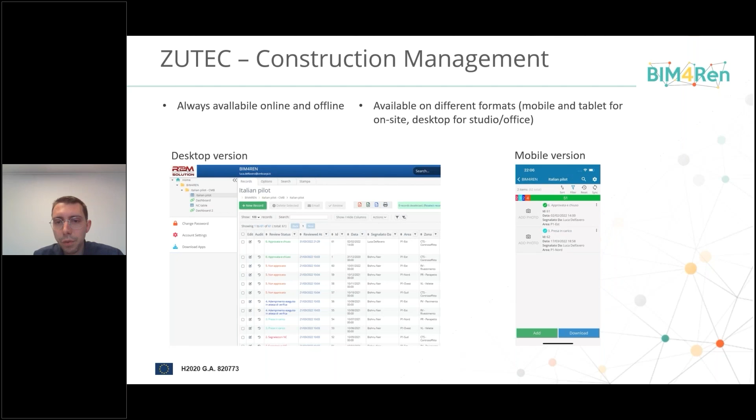And then, of course, linking this task to a plan in order to locate the NCR. For Zutec, what we understand is that it's useful in terms of interoperability, because we are able to organize all the data, but also export this data in PDF, Excel file, and create direct messages to the subcontractor. So we have a lot of output from this side.

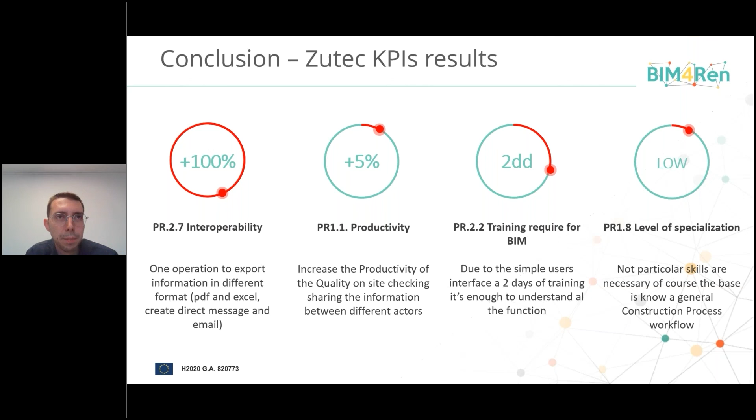It increases productivity, yes, because we don't lose time searching. For example, one of the most common problems was that the NCR names were input as people wanted, so sometimes other people couldn't recognize the names. This was quite a big problem, and it's something very appreciated in terms of training and level of specialization - it's easy to use, even with a low specialization level, because we just need to know the construction process workflow, what an NCR is, or the process in an NCR.

And then we tested Rialto. Rialto is a beta software, an augmented reality technology, in order to accelerate and improve quality on-site construction for snag lists, audits, and so on - integrated in Zutec, for example.

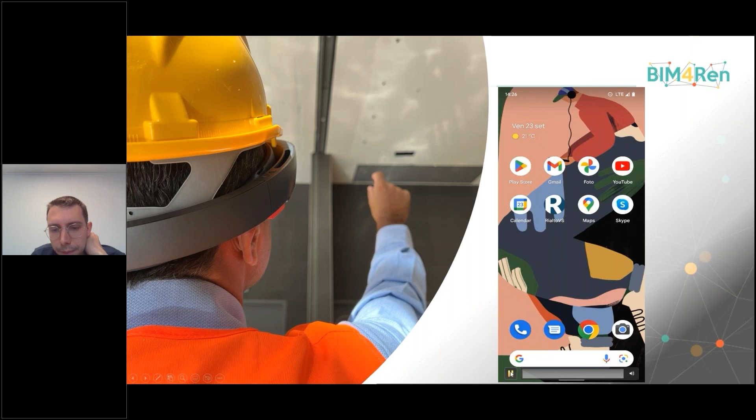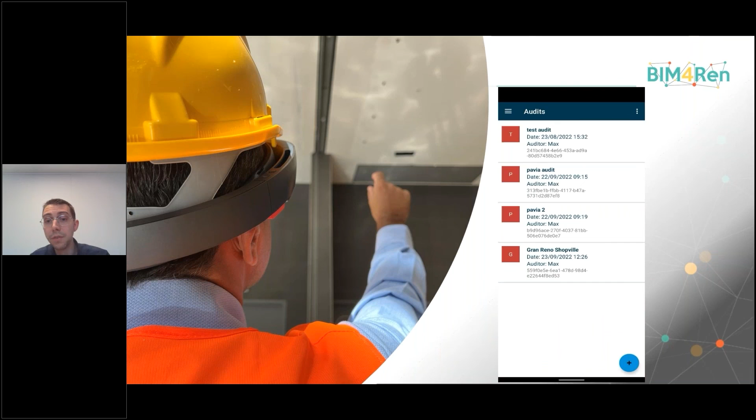Here I would like to show you some images, hoping that you are able to see the video. Here you can see what we did in Gran Reno. The idea is to go on site through a glass, in order to see the augmented reality, and then start to see the building, the reality of the building already in place, and then open an eventual NCR, snag list, or whatever you have to do.

In this case, for example, a tile appears broken. So what we do is sign the tile, setting all the information in order to evaluate this problem. And then, of course, the people go through the evaluation, and after that are able to see these things associated to an issue in Zutec - tracked in Zutec, go to the office and be able to acquire the problem and try to solve it.

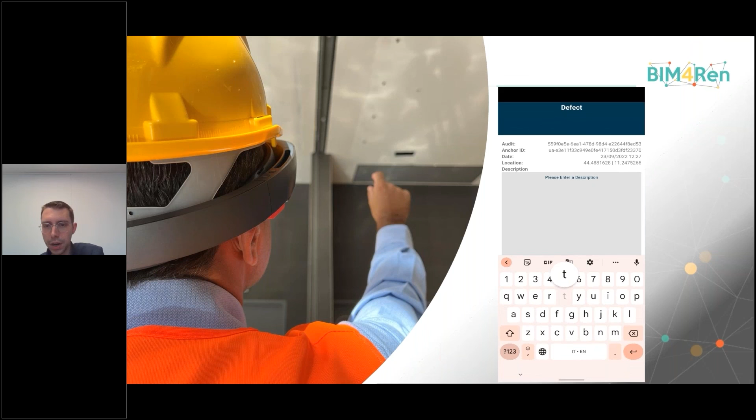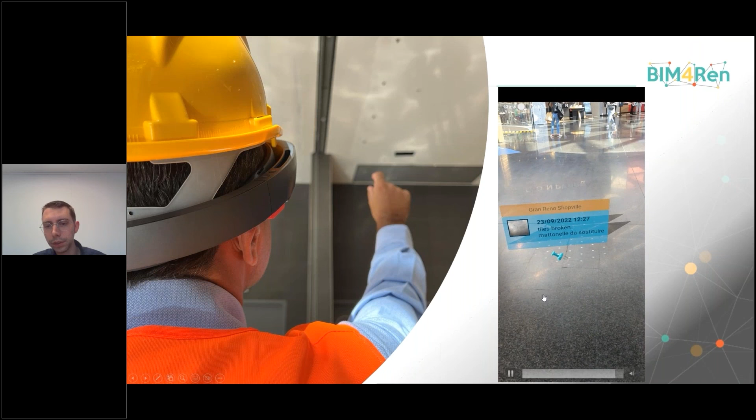I think this is the idea. So here the opening, and here the broken part - la mattonella, the tile, is to be replaced, and we know exactly what we have to do and where we have to do it.

Going through, so also for Rialto, we try to evaluate and make some conclusions on the tools tested, and what we can say is that, in this case, augmented reality is nowadays something in descending price, so the advantages can be really affordable and can be really high.

The productivity is increased, yes - in what sense? Because when we go on site, we have to work with people that are not used to modeling, not used to digital things, but are used to reality, and the augmented reality is the right link to these things.

And then, training required for this stuff - I would say that a more deep training is required, but just because we have to get people used to using these glasses on site. It's quite a deep theme that needs to be better articulated and gone into in detail. But in terms of level of specialization, everybody can go on site and start an issue.